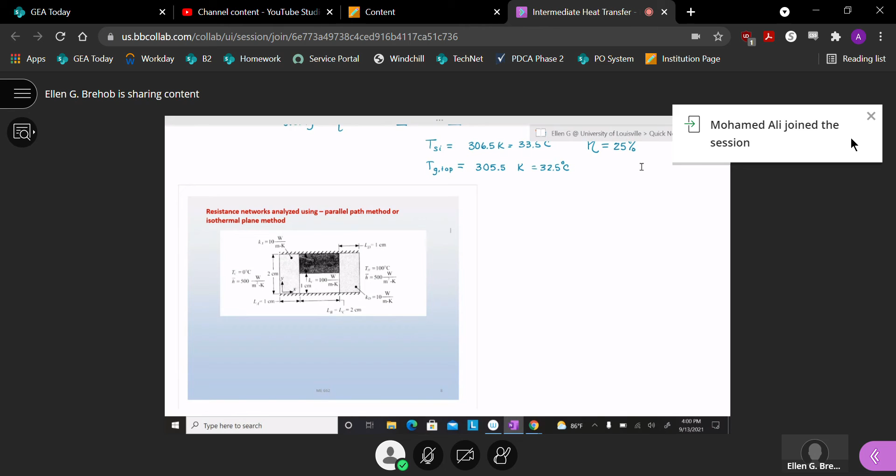Okay, thank you. All right, before we get started, this is lecture 3. We just finished this problem. What did it look like?

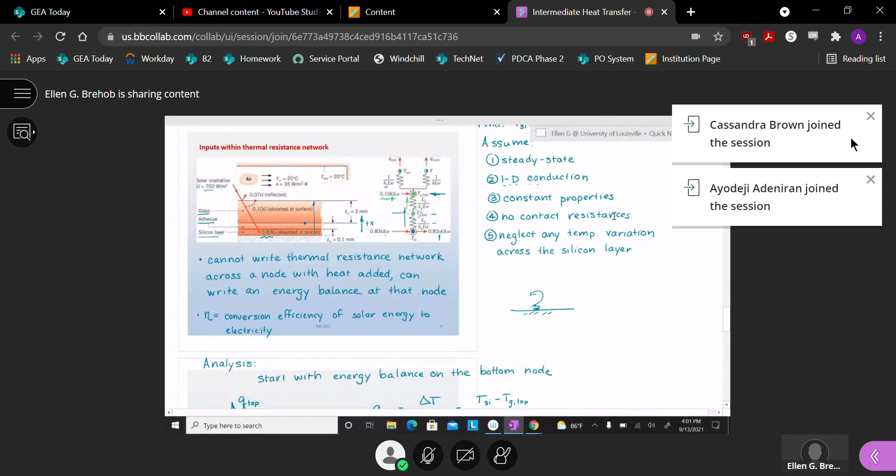We had heat addition at nodes of our resistance network. The interesting thing about resistance networks is we never want to have heat addition. We still can't write a resistance network across this whole system because the heat addition makes that invalid, but we can write it at certain nodes.

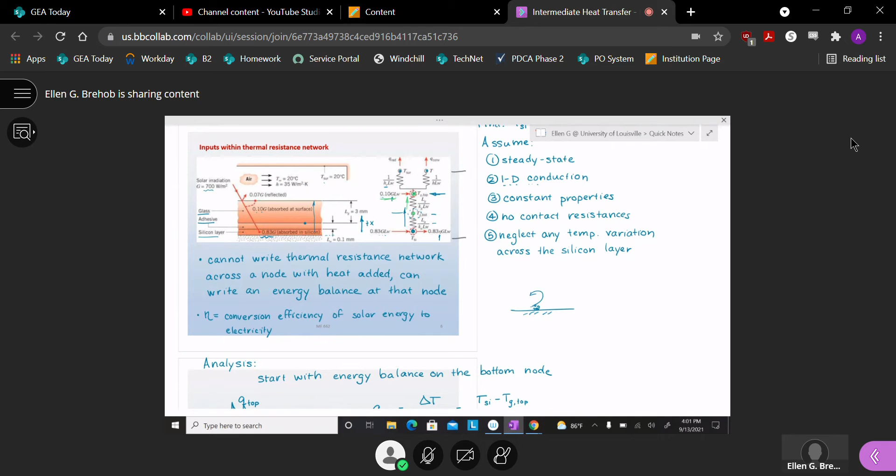Okay, and I got to come up with the problem, so you get to try it once. We kind of went through this one, but you haven't tried it. So in just a minute, we'll start this problem.

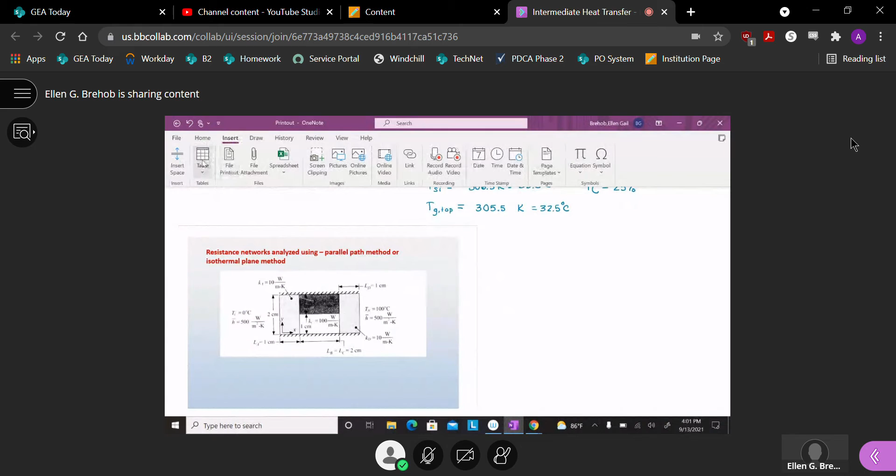Okay, I keep having this announcement and I forget to make it. Do you recall it was your first homework set and I asked you to look at some student work? It was taken from a different course, not this course. It was just some problems from 2 students, and one of the students, I loved grading his homework. Some of you wrote that he was verbose. Anyway, I just thought that was funny.

So it's like, you need to be more concise. But I'll tell you, I found his homework pretty easy to grade. I could follow through the steps. The handwriting wasn't the best, but to me it overrode that, since he spread stuff out with all the steps listed. I think in general people thought it was okay, you just thought it was maybe too long. And when students hand in homework, people would have like 5 sheets and this guy would hand in like 20. But it was like, I knew what I was getting. Anyway, not necessarily encouraging all of you to follow that mode, but I probably sway more towards finding it easier to grade homework with more steps explained than these really concise homeworks.

Somebody asked about engineering equation solver, EES. You will likely have to ask me some more questions, but this is what I know for now: there is a way to download EES from the engineering software bundle at the U of L. It will be on the Speed IT website, and I can give you that information.

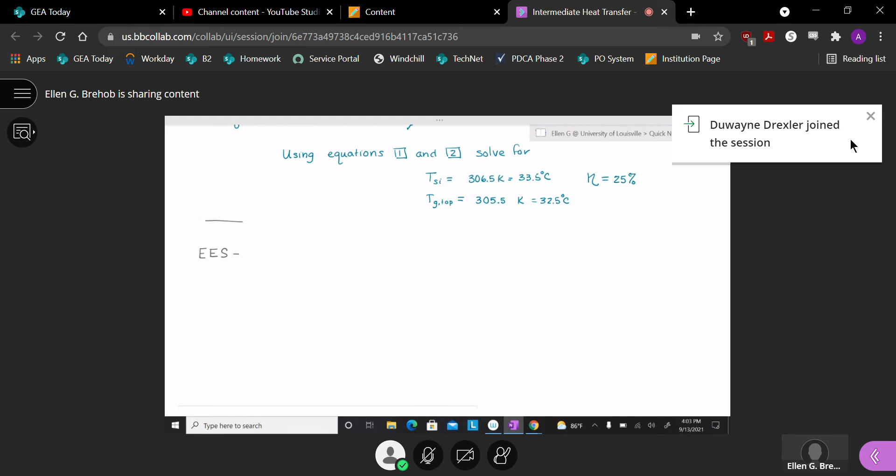But I'll tell you that you need to be on the U of L network, so you have to be on campus. I think our library is really nice, it's got good air conditioning, it's pretty big, it's pretty quiet. If you came to the library sometime to work, you would be on campus.

You could use EES. I'm also making a pitch that we have a student rec center, a pretty nice gym facility. I don't know that you want to study there, but you could study there and then get a workout. So you could be on campus and there may be a reason why this works for you.

So let me know and I can send you more links, or it's probably not too hard to find if you went to Speed IT. But I think that is not what most of you wanted. I think you were hoping there was a way to use it remotely. If you're thinking back about a year ago, somebody who really wanted EES to be part of their course went through big hassles getting VPN accounts for each person who wanted to use it, and Speed IT is just not going to do that again.

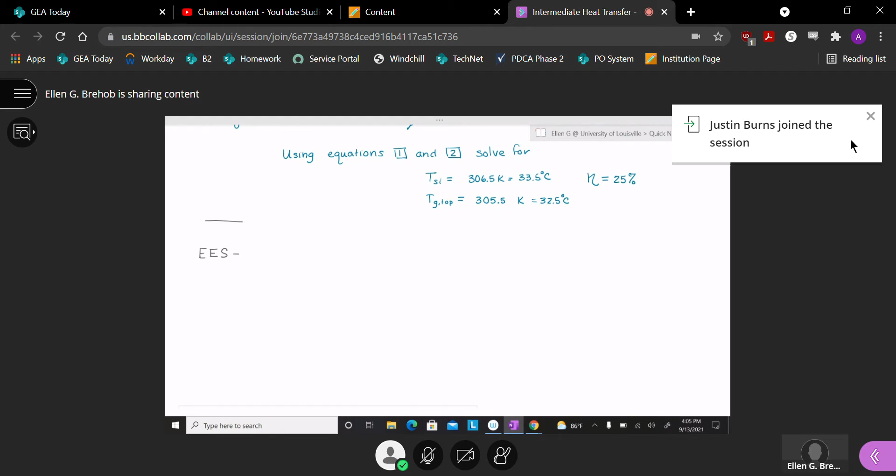So I'm telling you the options. If you want to be on campus occasionally to use EES, there's a way to figure it out. If you want to use it at work, you are going to have to work with Carlos or whoever else gets you guys access.

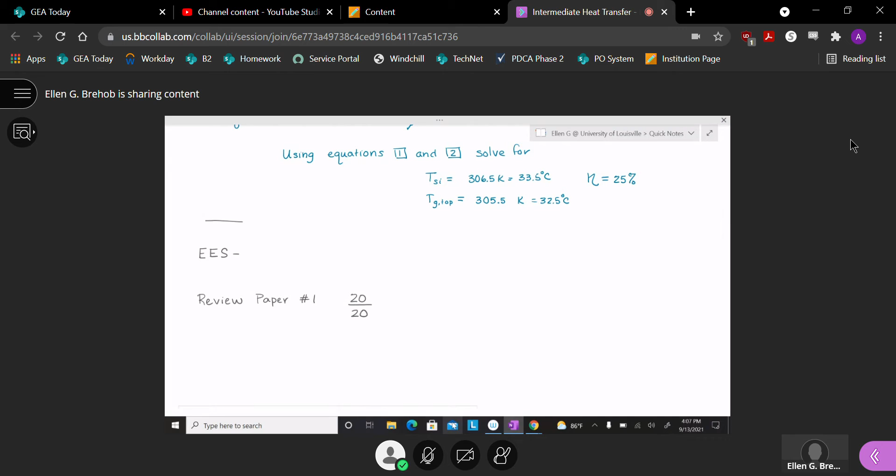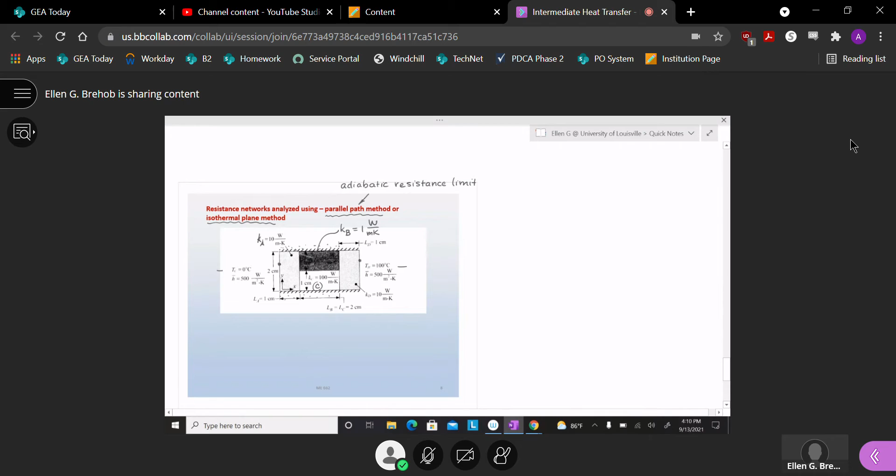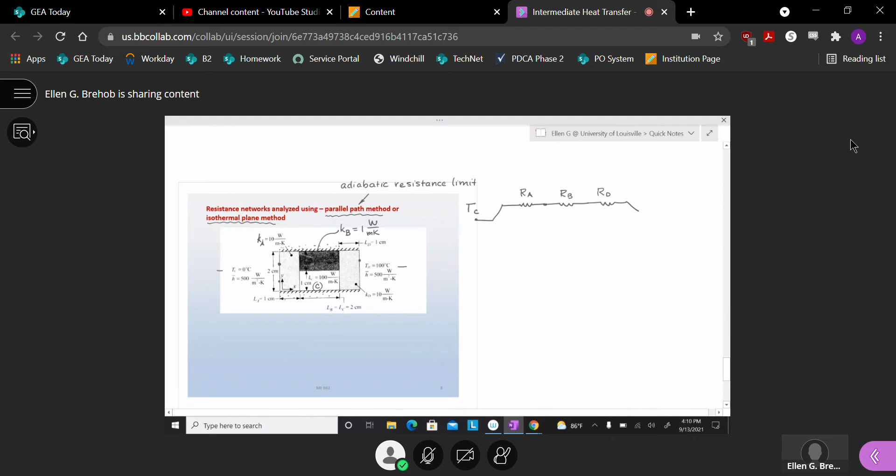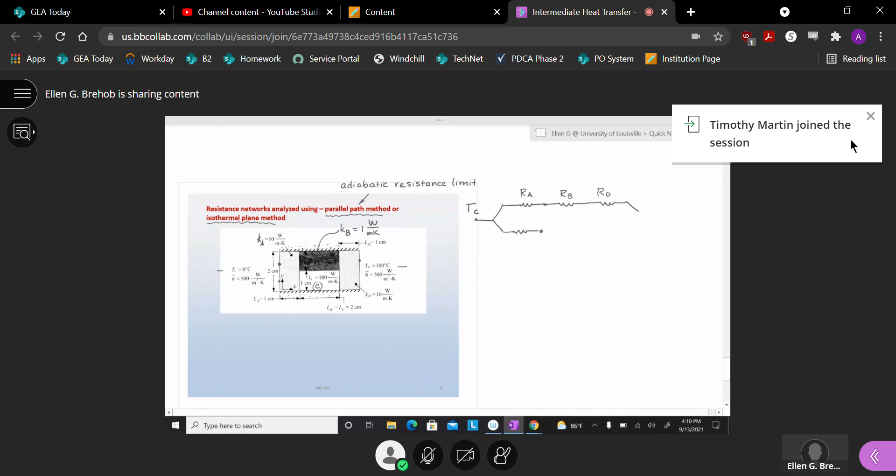The parallel path method picture: I have a temperature node over here and a temperature node over here. Heat that starts flowing through material B - I'll show it first goes to material A, then material B, then material D. That is in parallel with some heat, some energy, that starts passing through material C. It stays on that same path - it's going to go through A, R-C, sorry I messed that up, A, R-C, and then R-D.

So you can picture some of the heat going through one path, and some going through this other parallel path. This is the picture for parallel path, and I like this name way better - adiabatic resistance limit. I can sometimes think through why that name makes sense.

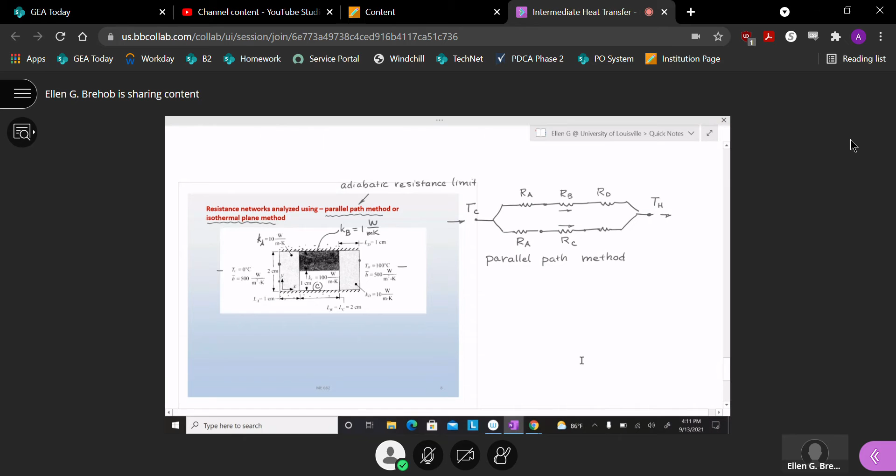Okay, the other one is isothermal plane. An isothermal plane means that each place you move to a new material, it's a uniform temperature. So for example, I have some unknown temperature T1, and I could put maybe a T2 here. So isothermal plane would say I got cold here, and it all goes through to material A.

But now, once I get to T1, these packets of heat can determine whether they'd like to go through B or C. I don't mean it can decide, but you can think about it this way: if one has a lot more thermal resistance, then maybe a packet heading this direction will decide it's easier to get through C, since it has a lower thermal resistance. So it chooses one of these pathways.

Okay, and now we'll get to another plane of constant temperature. And now all of that heat has to pass through that slab of material D.

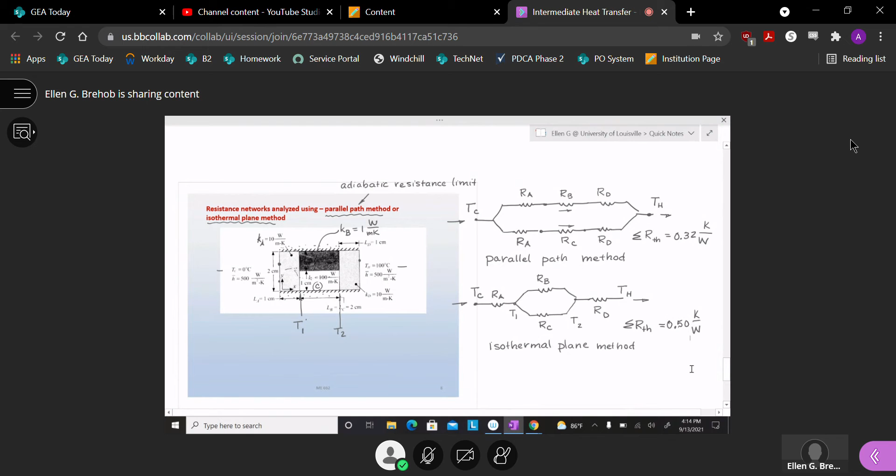If I summed up using the isothermal plane method, thermal resistance is 0.50. It works out that the parallel path method will always give a lower thermal resistance. This was just a given example, but no matter what we picked, it might be a small difference, but it will always be a little bit lower.

Okay, let's do one more thing. So they gave us the temperatures on these two faces. If I calculated heat transfer through this, you can picture that the rate of heat transfer through the parallel path method is going to be larger since it's got a smaller sum of thermal resistances, thinking Q equals delta T over sum of thermal resistances. So this Q would be 313 watts, and this Q is 200.

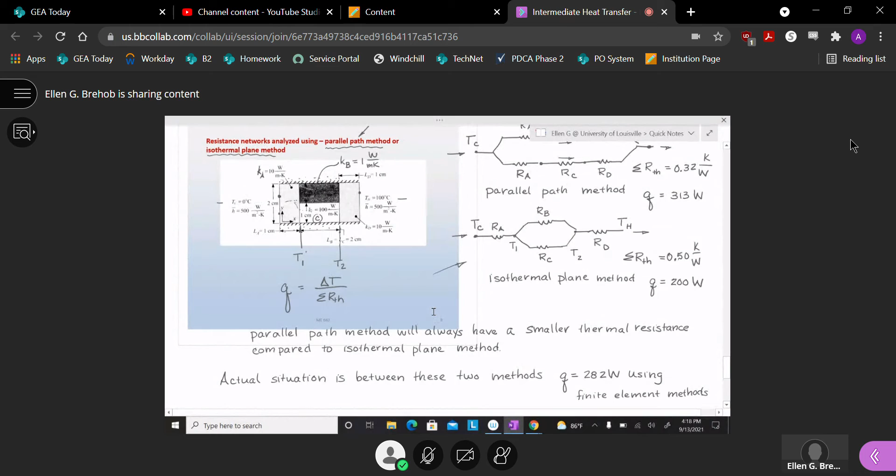And the reason that neither of these resistance network models is perfect is that if I were drawing heat flow lines through this, I have material A and material D, then material B, which has low thermal conductivity, and material C, which is high, so it's going to be able to transfer heat. If I were drawing heat flow lines, I might have something like this, heading this direction, but I can see that this is going to be a simpler pathway.

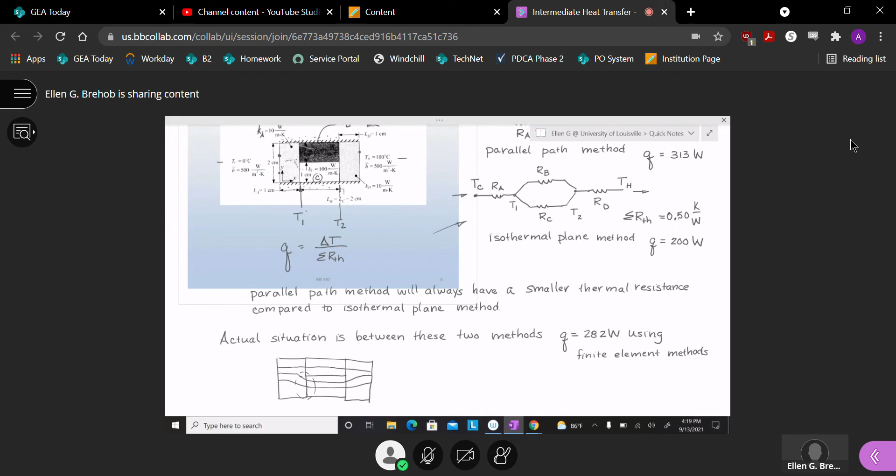Okay, so flow that's in the upper half might go through material C. The thermal resistance network is based on one-dimensional conduction, that's one of our assumptions. But through these materials, it's not one-dimensional, it's not only in the x-direction. We've got some transverse heat transfer, and so we don't do a perfect job.

So our estimates may be okay, and in particular, if we don't have such a dramatic difference between these two materials B and C, we might not see that much difference between these two paths. But this problem was made up to show a little bit more significant difference.

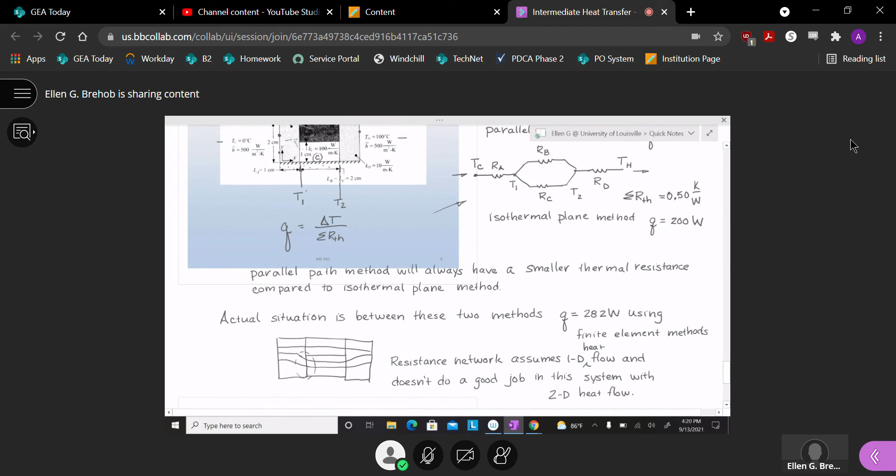This next problem, when we meet in person for class, I usually have students work in groups and solve this problem. But that's not going to pan out, so I'm going to show you a little bit, we'll set some of this up. There really isn't too much interesting about this problem. You get to see some different types of resistance networks, different terms that go together in the resistance network.

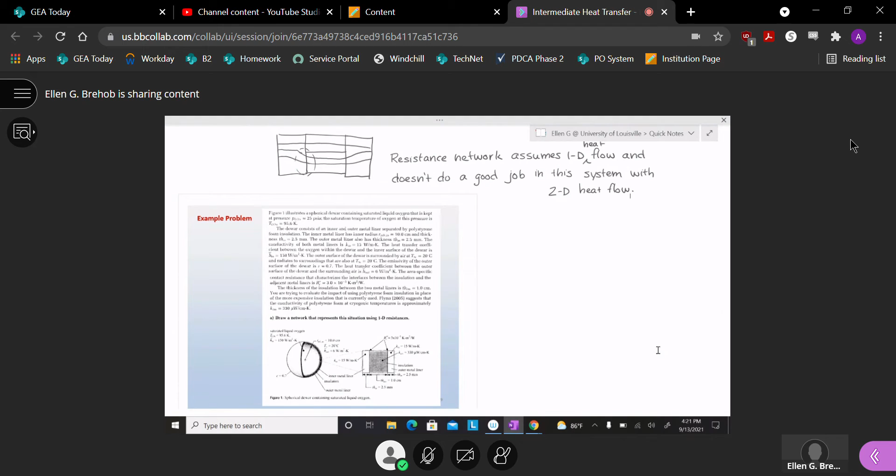The thing that I think is interesting is this has radiation going on at the outer surface. And we talked about radiation involving a surface temperature, and we don't know the surface temperature. So it's a chance to think through how you could handle that radiation with that unknown temperature in there.

Okay, this has a lot of details to it, but they're saying we've got this spherical shell that contains liquid oxygen, and they tell us the liquid oxygen is at 95.6 Kelvin.

And then they give us a whole bunch of information. Let me go ahead and sketch out the resistance network and not read through all of these details.

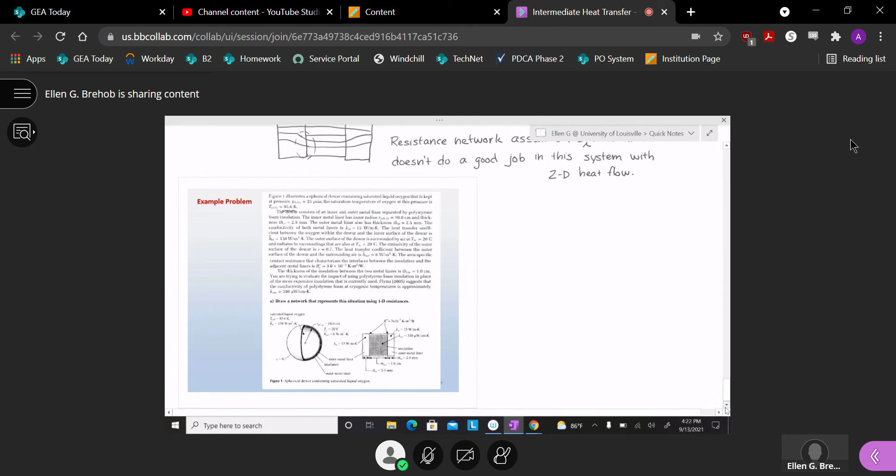But we have, from this inner surface, I'm going to start from liquid oxygen. There is a convection coefficient. And then we have a metal liner. There is a contact resistance. There's insulation. There's another contact resistance. There's another metal liner. And finally, that is the outer surface of the tank.

They tell us that the ambient temperature surrounded by air is at T infinity of 20 degrees C and radiates to surroundings that are at 20 degrees C. So our air and our surrounding temperature are the same.

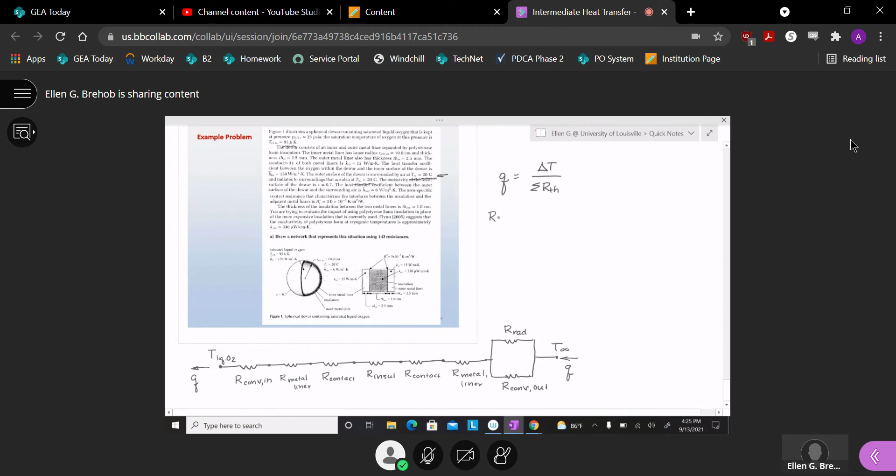For convection, the form looks like 1 over heat transfer coefficient and then surface area. And so we got to look through and see where they give the convective heat transfer coefficient. The heat transfer coefficient between oxygen within the dewar and the inner surface is 150.

And one of the difficult things is usually figuring out surface areas, but I'm going to remind you surface area for a sphere is 4 pi r squared. So you got to figure out what radius you're at. But let's say we know everything. We got those too. For the metal liner...

This is a conduction resistance through this, albeit it's a thin layer and it's metal, so it's probably pretty small. But that would look like 1 over R1 minus 1 over R2, over 4 pi K. And this is going to be K for the metal.

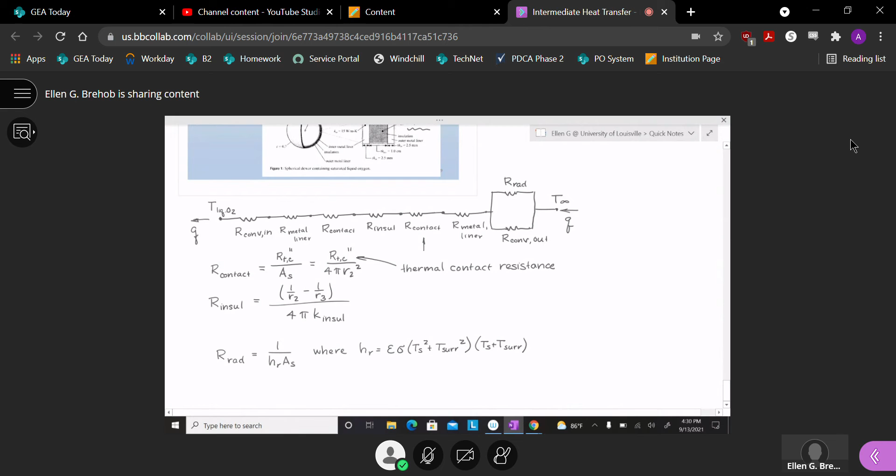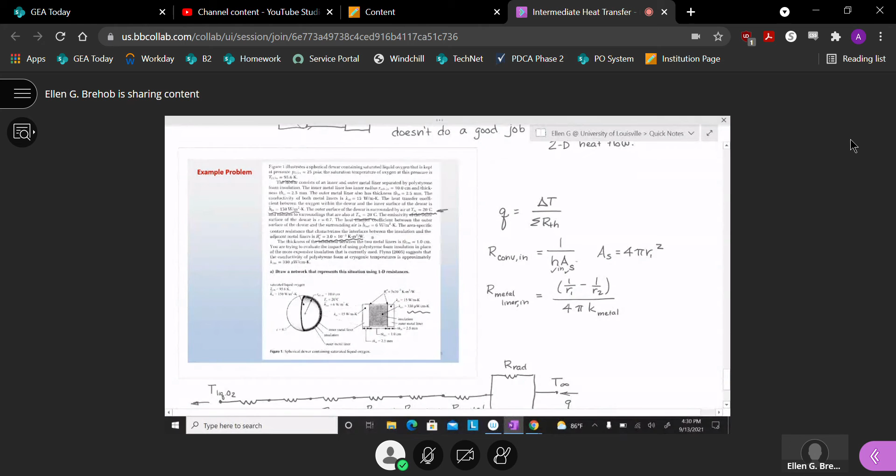It is given in the problem statement. And I know I did not read through all of it, but if you looked a little bit later, it's given right there. And you're imagining that I don't have perfect thermal contact, and because I have metal layers, they're saying this contact resistance might be significant. I should probably include it. It might be on the order of these metal liners.

So this is the one where once we get here and we realize, we're given the liquid oxygen, we know T infinity, so we know most temperatures. We don't know that surface temperature. So one way to attack this is to guess what this temperature is. So the other day we had this approximation.

And it's for a relatively small temperature difference. I'm going to say I don't know what this T surface is, but I'm going to say it's not that much different than T infinity. I'll just put T infinity or T surrounding, putting T surrounding in here as my estimate.

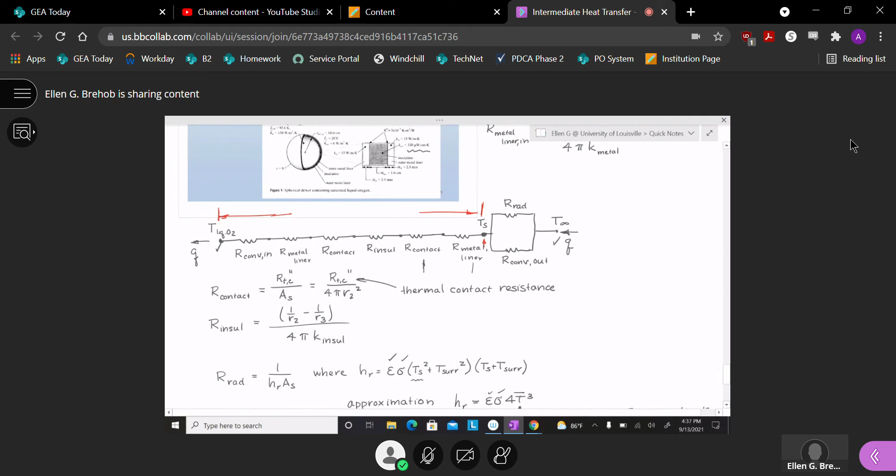I'm going to work from here to here, and I can solve for the surface temperature. So I want to rewrite this equation one more time. We didn't know it, we did some workaround to make an estimate of it, but now we could solve for it.

All right, and already I don't like that because that's going to give me a negative sign. Liquid oxygen's way smaller, so let's just go ahead and reverse that order.

And now, and I will not remember all of these, we want to do our convection in, our metal liner on the inside, contact resistance on the inside, insulation, another contact resistance on the outer surface of the insulation, and metal liner out.

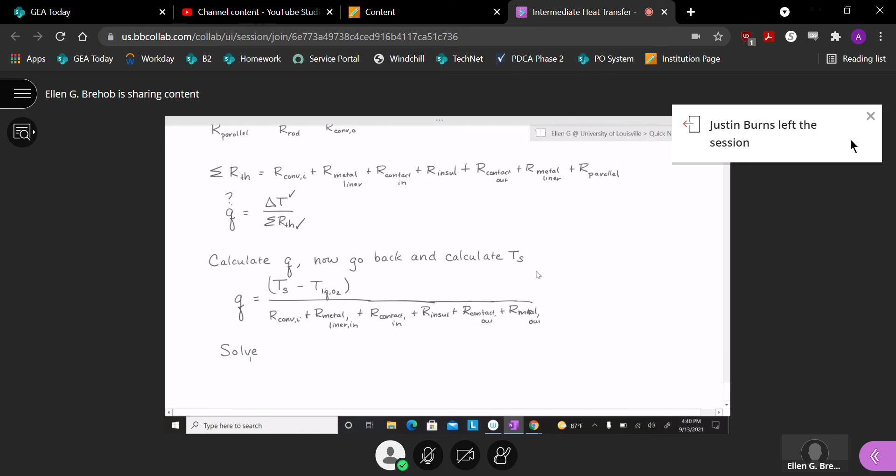Yeah, I think I was not... so I mean, they look like they're the same up here, but when you run through the numbers, because they have areas in them, they turn out different.

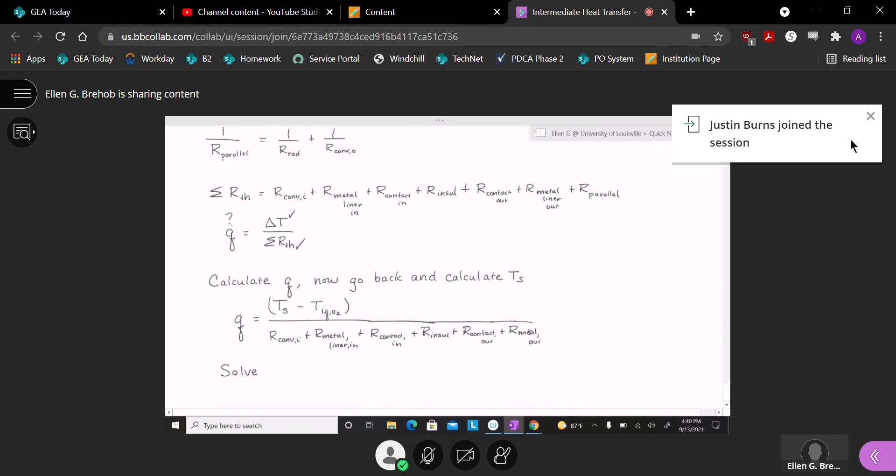Right, okay, so I've rewritten this equation, and our whole goal from this is I'm using that Q that I had, I just came up with the Q. I'm using that here. These are all the values I've previously calculated. I know for liquid oxygen, I'm going to solve for surface temperature.

All right, and this is where you would be happy if you put this into a spreadsheet, because you wouldn't have to keep calculating these things. So I could go back through and I would update my H sub R. We had to make an estimate for it, but now I can put in that surface temperature.

Dr. Brehob, should the parallel resistance also be in the denominator of that Q equation I just wrote? Yes, okay, no. And you're giving me a good chance to hit this one more time because I've been scrolling around too much, likely.

Okay, so we're working from surface temperature to liquid oxygen. If I look back up here, you're right, I'm only working...

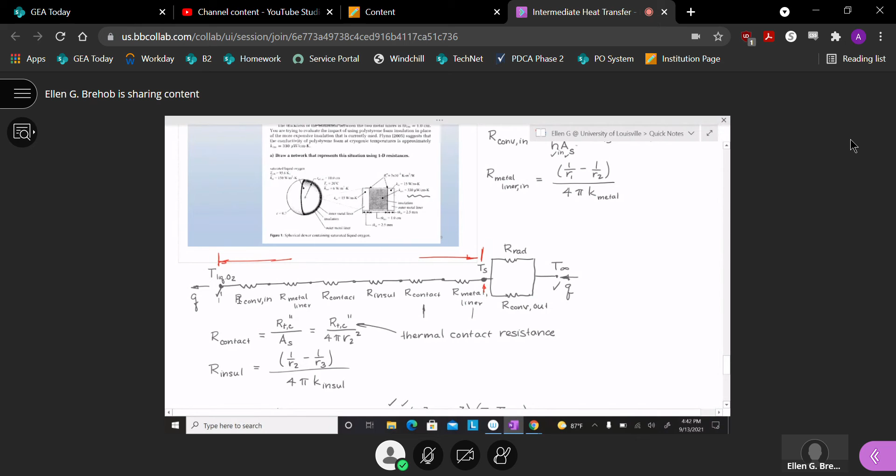Thank you. And then why wouldn't you use T infinity here instead, instead of T liquid? Like, go the other way and use the parallel resistance instead.

Okay, the reason I think is because you've got this unknown H rad in it, which we're trying to recalculate. So you could do it the other way, if you're thinking you'd just work across this section. But because this is the term we're still working on, these other resistances, even though it's longer, it's all the same thing. So to me, it was easier to work that direction.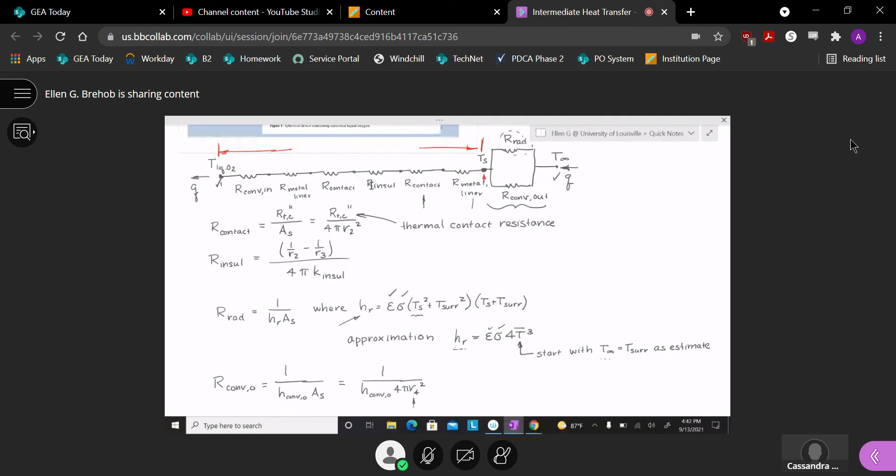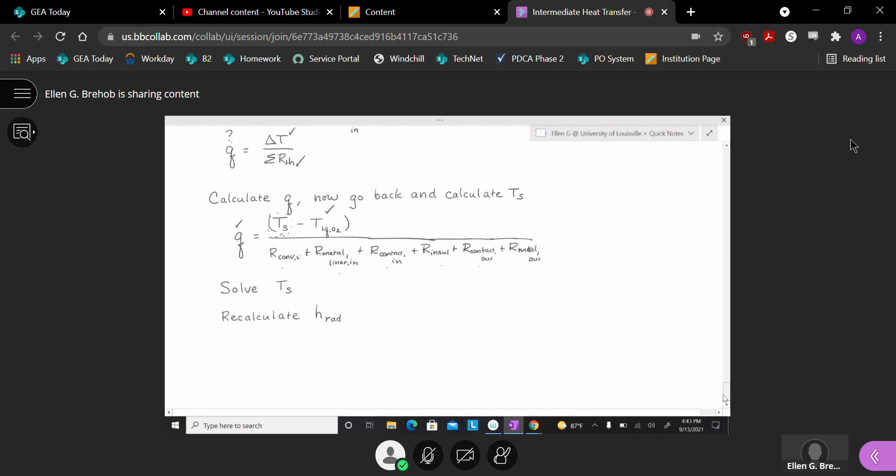Okay, thank you. Okay, so in my steps, what am I saying? So we solve for T sub S. We can recalculate H rad. We can recalculate...

And again, that's going to be the total. That's going to involve the two resistors in parallel, since we've gotten this new radiative heat transfer coefficient. Now we've got this new thermal resistance. We've got our same delta T. We're going to recalculate Q.

Let's see, I went through this process three times: solving for a T S, getting a new H rad, getting a new sum of thermal resistances, calculating the new Q. And I stopped, and I'm trying to give you some kind of indication... my first time through...

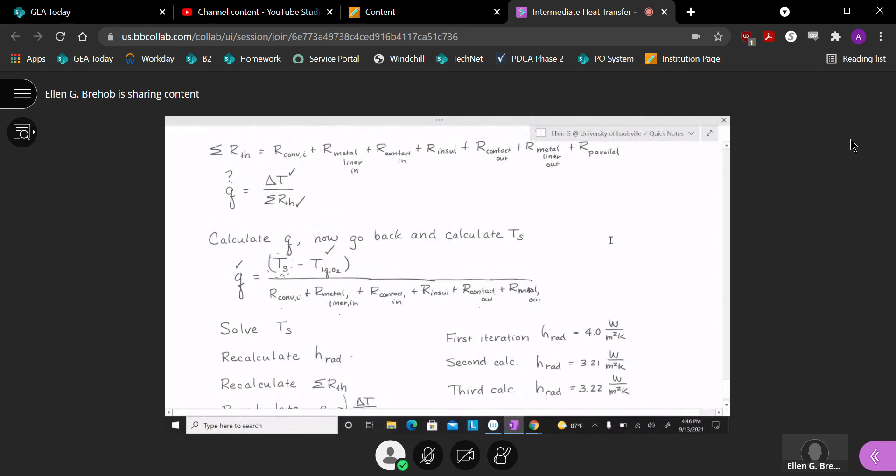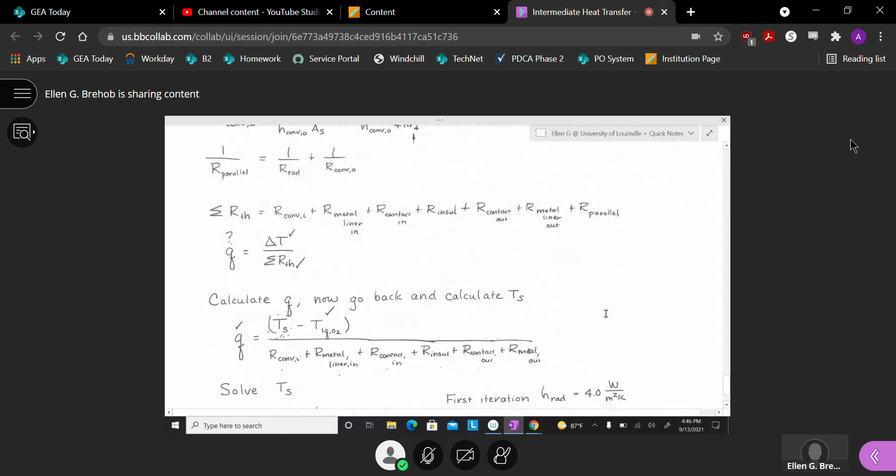All right, so that was a lot of cranking through numbers. One thing I'd like you thinking about is the issue of this radiative heat transfer coefficient, which always looks just like another resistance element, but because it's based on knowing surface temperature, if I look back up here, sometimes it throws an additional complexity into the situation. The way I got around it is by making some guess and iterating through the problem.

Okay, and if you're concerned, this is usually not a problem where you have issues with it converging. It will converge. I think that is it for talking about thermal resistance networks. And then I am ready to move on to lecture 4.

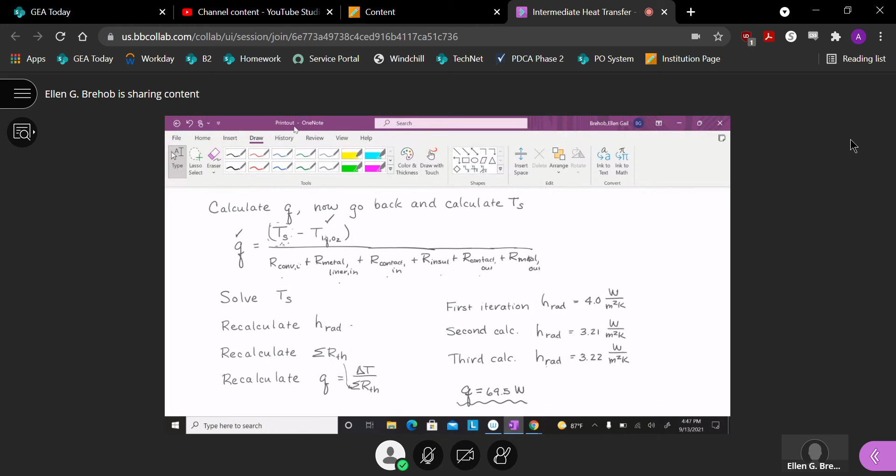Hi, Dr. Brehob, I have another question. Yes. So what did you do for the third calculation? What estimate did you use?

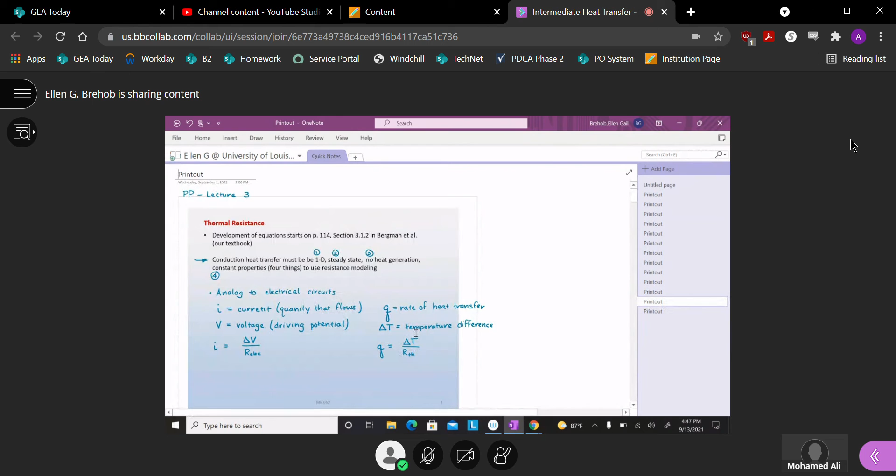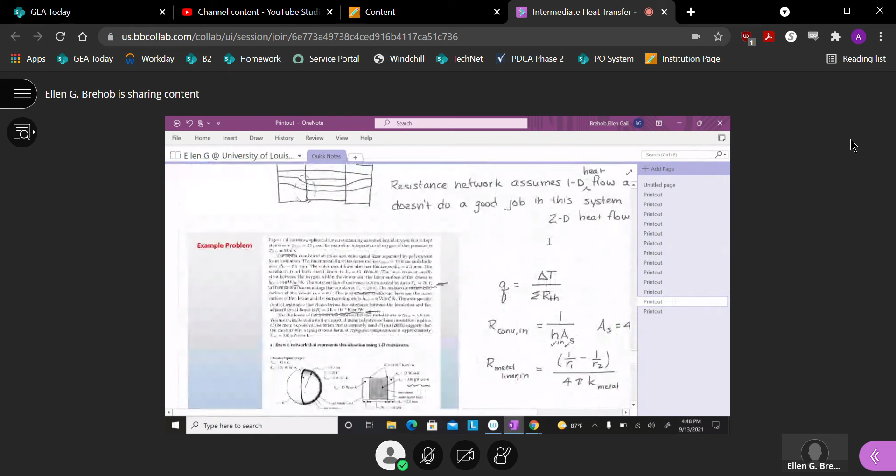Okay, I'm not sure I got your question yet, but I'm scrolling down to where I think you're heading. Yeah, so I followed how we did the first iteration. You approximated using T... oh, I just said I'm going to guess T infinity is equal to T surroundings to use in that estimate.

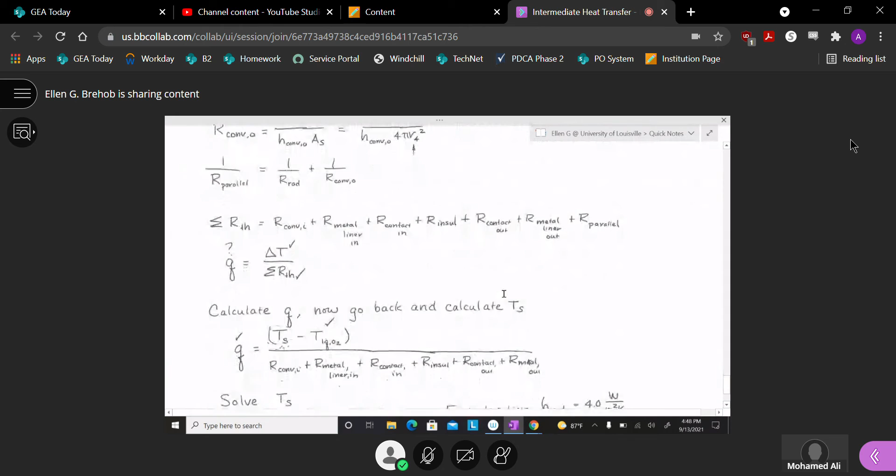Right, and then you went back for the second calculation and solved using the left-hand side of the network. For the third calculation, what did you do? Once I've got a surface temperature the first time, the third time I'm going through the same thing, I'm going to get a new surface temperature. So I put this in. Let's see, where did we do this?

So we recalculate a Q from this second iteration. I've got my new H rad, I get a new sum of thermal resistances, I recalculate Q. And now, just like I did up here for that third calculation, I'm using that new Q. I'm using all of this stuff, and I'm going to use my red pen because I'm circling stuff, but you don't know what I'm circling.

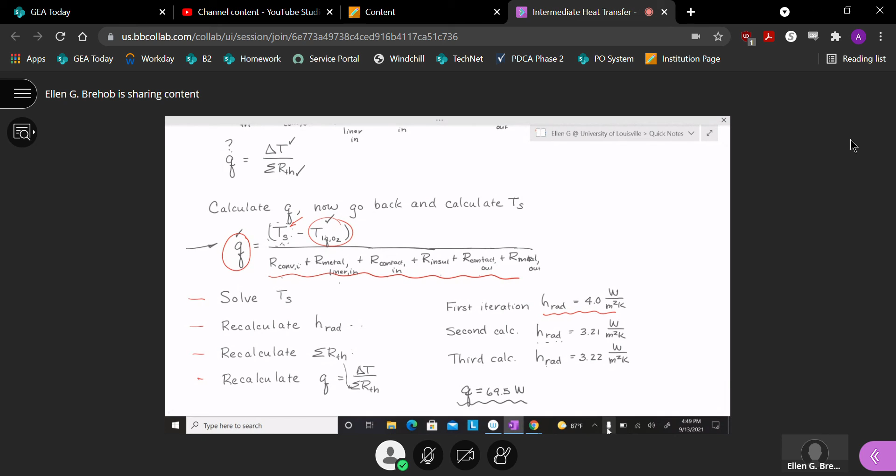Okay, so I've used my new Q. All of this stuff stays the same. I'm going to solve for a new T surface, and now I'm just following through these steps again. So to me, except for the very first time when I had to figure out some way to get an estimate for this, after that I'm always using my new surface temperature in this equation to get the radiative heat transfer coefficient. Okay, got it. Thank you.

Okay, so this would be lecture 4. And we are going to talk about fins. Another name for fins is extended surfaces.

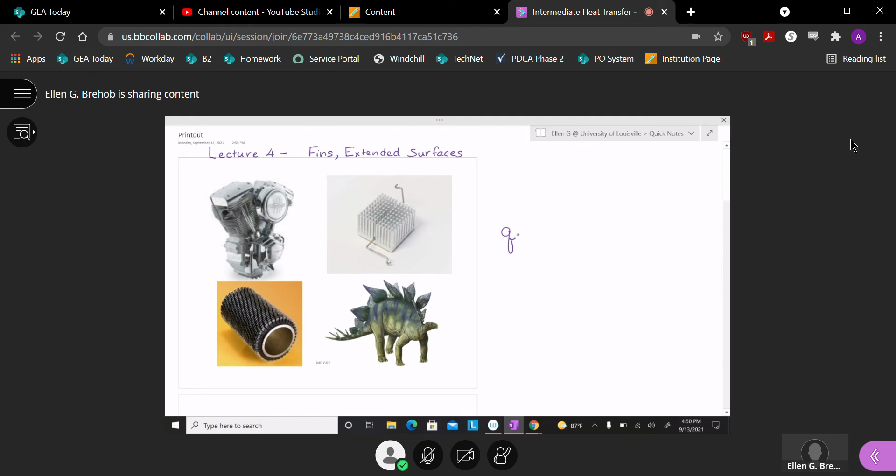There is a reason why this topic fits into conduction, so this is still in chapter 3 of your textbook. At first I always think, man, why would that be? Because I picture the convection coefficient, and I've just written down Newton's law of cooling, and we think about having a fluid pass over these fin surfaces, that it's a Newton's law of cooling kind of problem. But the simple analysis we're going to do is a conduction analysis, and we're going to set that up in a minute. I have these pictures here so you can think about some different fin surfaces.

So this is a motorcycle engine, and the combustion chamber may have fin surfaces, and for motorcycles that may be exposed, as you're running down the road, to ambient air. This next picture is common, at least in older computers, like a CPU unit, and it's got these hooks to try and have a nice fit, so it sits down on top of the electronic component that it's trying to cool, giving a nice force fit.

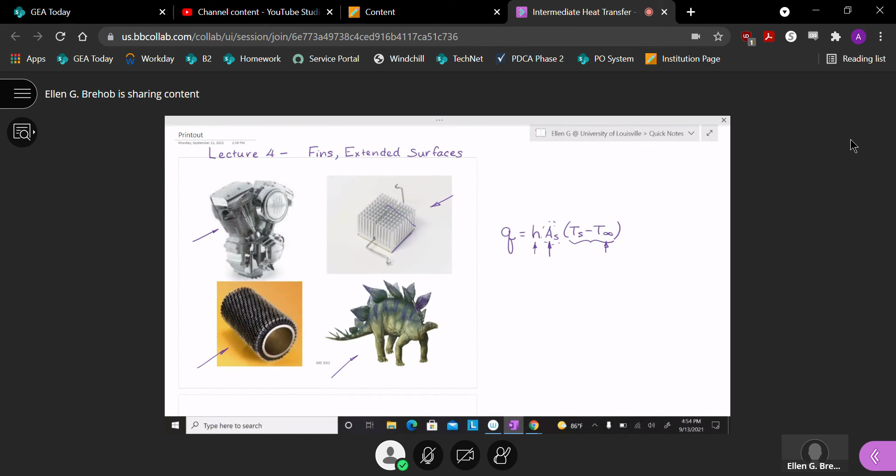And then the third thing you can think about is you could decrease the fluid temperature. But often you're going to try and use something that you have available, like river water or ambient air. So cooling the water below ambient temperature has some costs associated with it. So in practice, there is a reason why sometimes this idea of increasing surface area and adding a fin might be the cost-effective way to get more heat transfer.

All right, this is a generic picture that comes from your book, and this is showing an example of an extended surface or a fin. So it's attached to some base surface, and we are going to do an energy balance on this little orange section, this differential element of the fin.

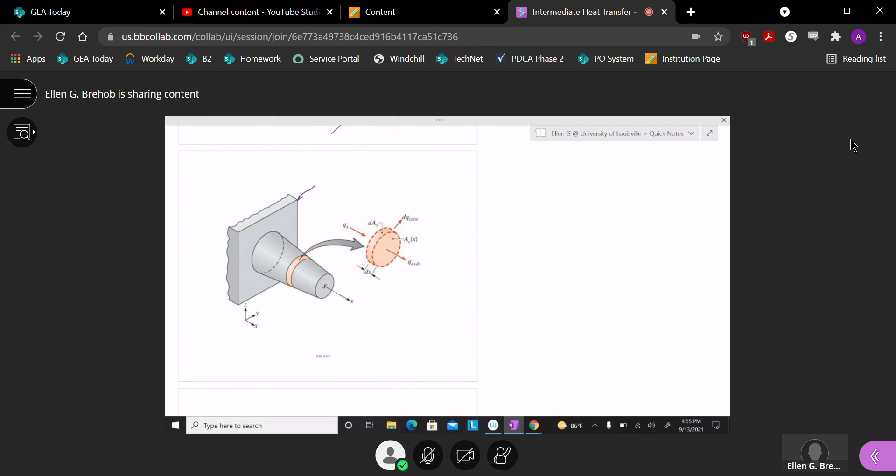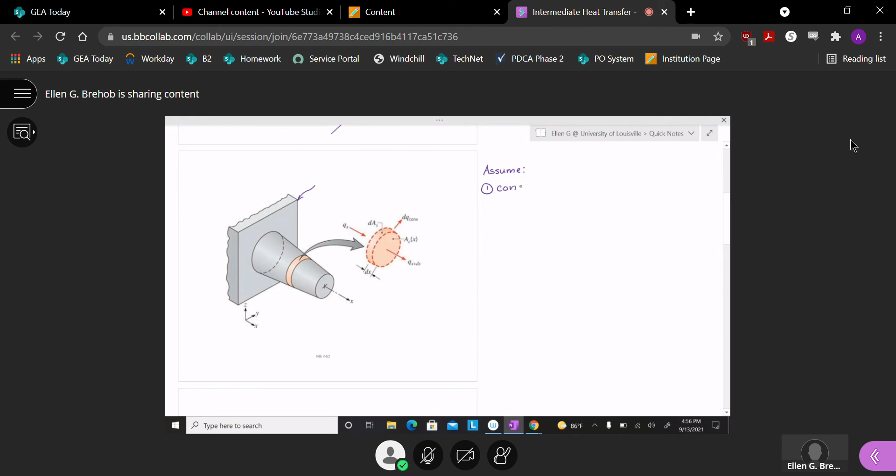We make some simplifications in our fin analysis. We're always going to look at constant properties, and that just says that K is going to be isotropic - it doesn't vary in direction, it's just one constant value.

We only look at a steady state analysis for fins, no volumetric heat generation.

Okay, and as our picture is drawn, they have X moving away from this base. Oh, here it is, let's look at that X coordinate down there. We only have conduction in the X direction.

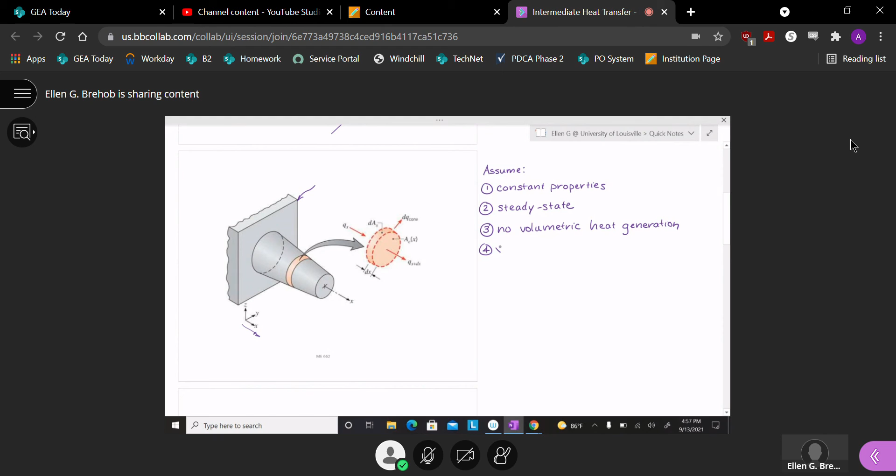Okay, so a way to think of this, X direction conduction only, and I'm going to make my sketch from the side view. So this is my fin surface, and I didn't draw it like they did. They've got it changing cross-sectional area. I've just got this slab pointing away from the wall.

Okay, and you can imagine that I have convection, so I got heat leaving this fin. But X direction conduction says that at each point, I'm going to assume temperature is nearly constant.

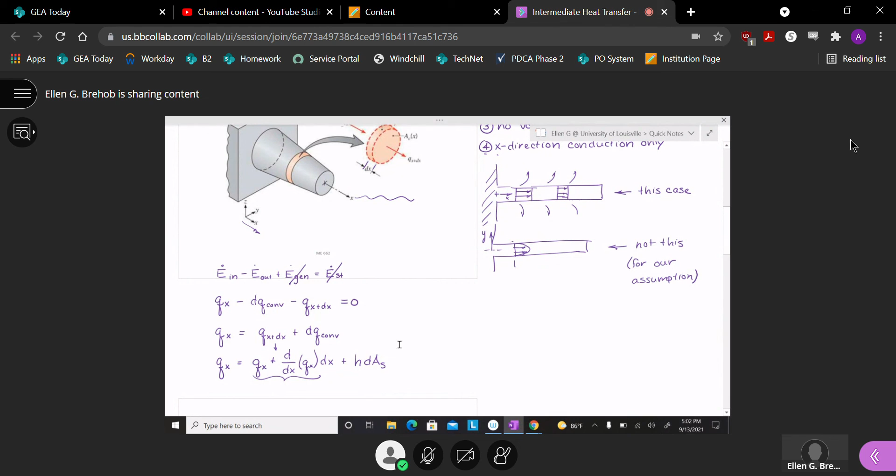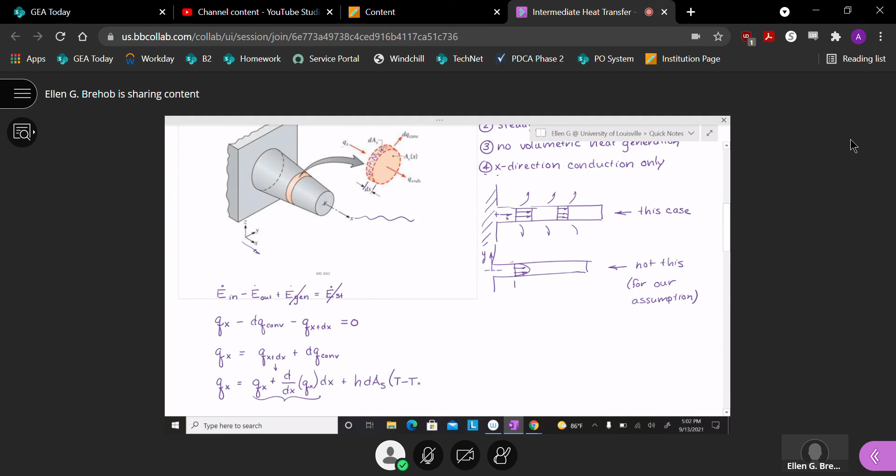Okay, and we're showing this little slice has a thickness dx. And dq convection, we're writing that... okay, so we're looking at convection off of this cylindrical surface, so it's a heat transfer. They're using a differential surface area. And then this is going to be temperature minus T infinity. That looks like convection.

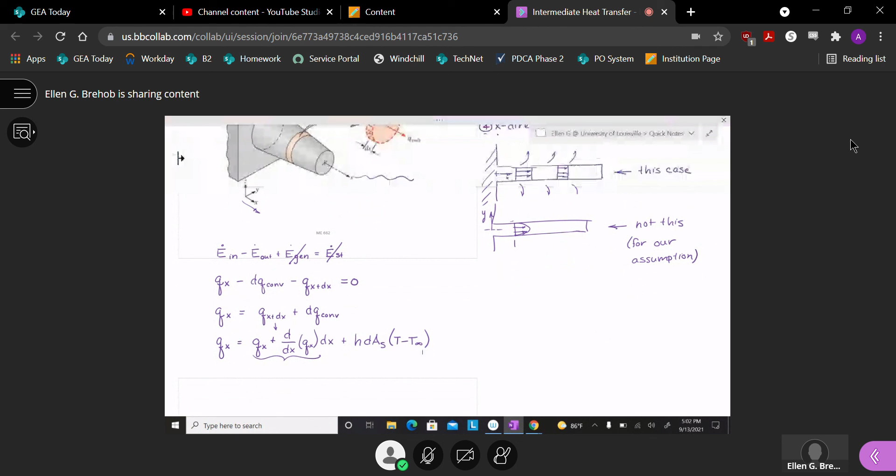You can already see that since these are on both sides of the equation, I could cancel those out.

I'm substituting in for qx in terms of Fourier's law. So minus k, and I've got a cross-sectional area and dt dx. And I'm going to put my little note over here.

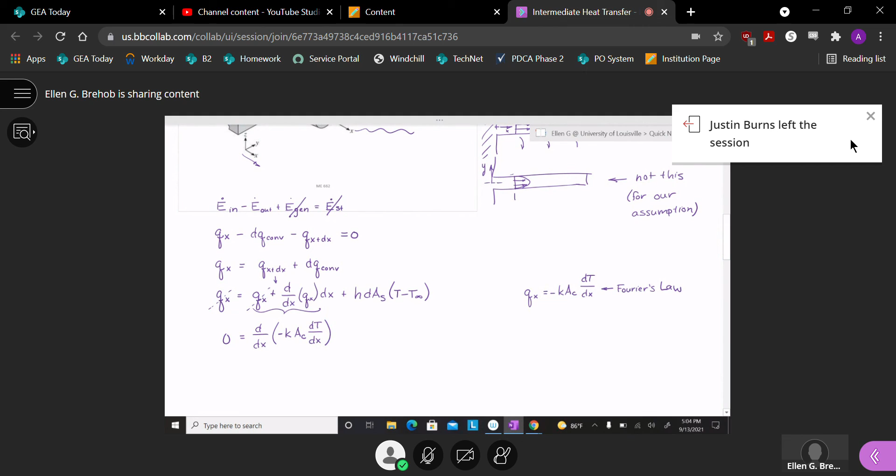All right, and I'm just repeating this h das t minus t infinity. Okay. I am going to go ahead and take k out in front, since we're going to say constant properties, and then I'm going to divide through on both sides. So I'm going to have 0 equals d by dx of ac dt dx. But now I took that negative k out in front, and I'm going to divide through, so I got minus h over k.

Okay, I got another bad thing, but let me finish this off. Das t minus t infinity. Okay, was anybody getting ready to tell me? And I only feel bad if you're like really questioning. All right, so I said I canceled these two guys, but I have a d by dx, qx. I need a little dx back here. I dropped that. So I'm going to try and squish it in here.

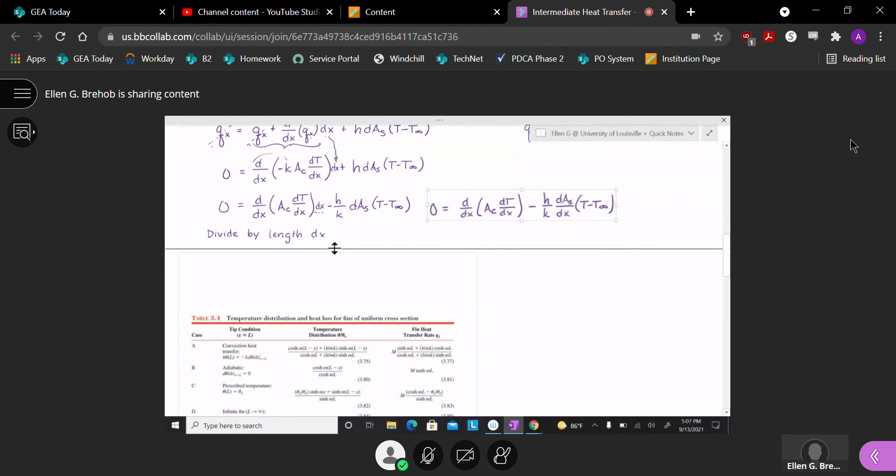Next thing I want to do is expand this first term, on the right-hand side of this. So 0 equals. So I can take derivative of cross-sectional area with respect to x, and then I have dt dx, plus cross-sectional area, and then d squared t dx squared. And I'm leaving the second term the same.

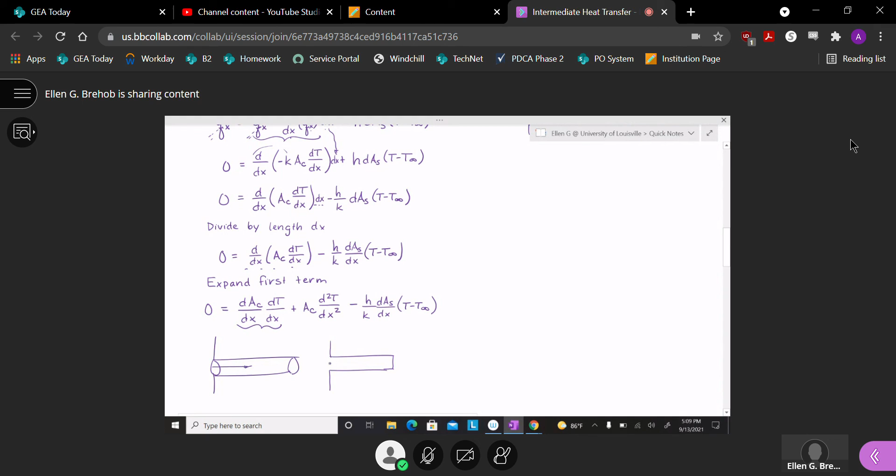All right, at this point, we are going to drop this first term. And the explanation we're going to give is that our first look at this, and we'll relax it later, is we're going to say we have uniform fins, uniform cross-section fins. So if I have a fin I'm going to analyze, maybe it is a pin fin, so it's a cylinder, and this is my wall. Not a good job drawing it three-dimensionally, but its cross-sectional area doesn't change with x. Or I could do, this one's easy for me to draw, if I had a plane fin, so it's just a slab of material, its cross-sectional area doesn't change with x. So for constant cross-section fins, this term drops out.

I'm scrolling up to my picture above for a minute. All right, this picture, they showed that cross-sectional area is decreasing. We can't analyze this using the equations that we're coming up with right now.

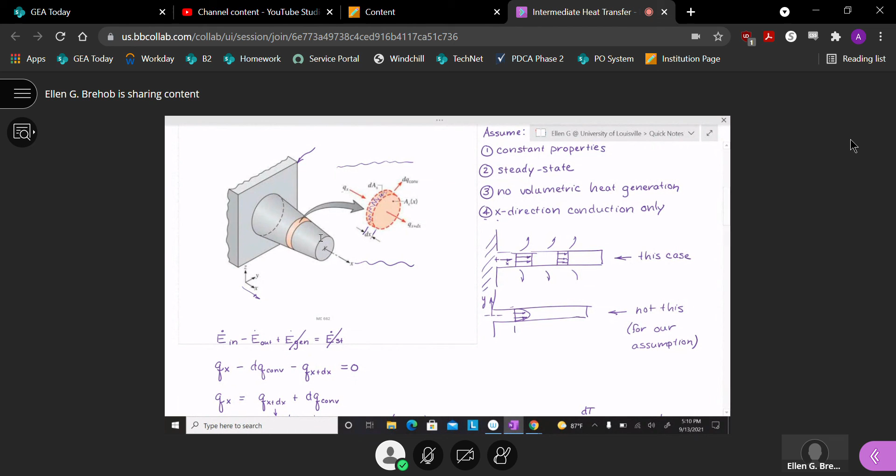So if we ever get a case for your class and we are shown this, would we just not be shown that changing cross-sectional area so that we can make that assumption? Because I wouldn't make that assumption if I had seen that other image first.

Okay, so that is the general case. And eventually we do have some fins that happen to be certain mathematical cases, like a parabolic fin. So we can handle some cases, but for right now, we're going to do more development with this uniform cross-section.

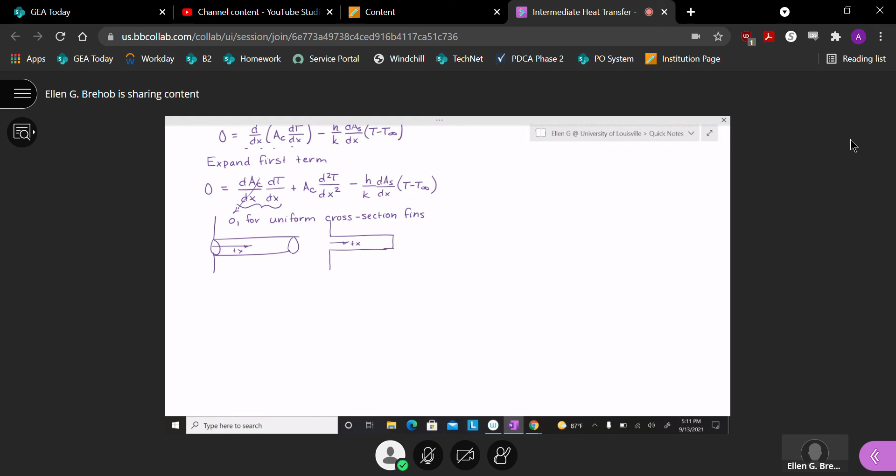If you're concerned, that was a general picture. They started out with that, but just know that these next sets will say uniform cross-section fins. You'll know when you have to assume that, or when we don't do the development. I won't show this detail of development when it's non-uniform cross-section, because the math gets much harder.

That helps it all. But you're okay with this idea now. I mean, you know what kind of fins we're looking at - that any slice I take in the x direction, I would always have the same cross-section.

Okay, yeah, no, that makes sense. That makes sense for this. I was just concerned about making the assumption out of the blue that this is going to be a uniform fin. But if we're told we have uniform fins, or at least given a diagram, then it makes sense. Yes, okay.

You will. All right, so what do I want to do next? So we've got this dAs - that's surface area, how surface area changes with the x coordinate. And for a uniform cross-section fin,

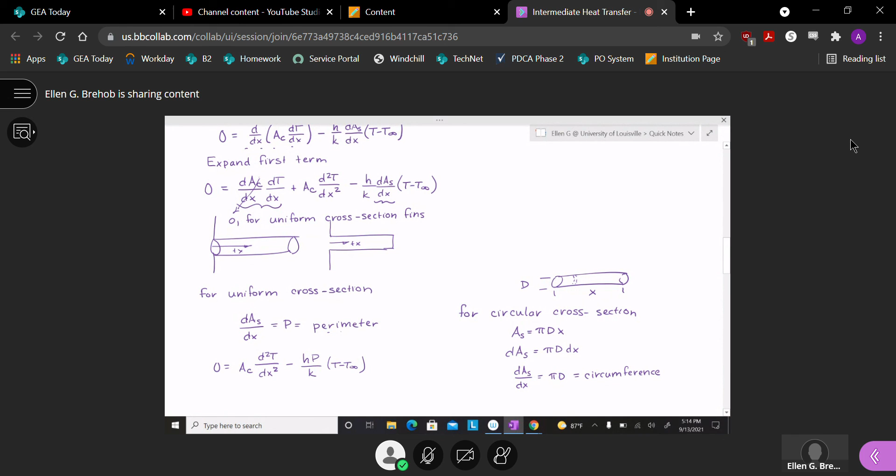So now my equation looks like this. All right, I'm nearly out of time. But let me do two more things, and I promise it won't be too much longer, just to get to this form. Now I'm going to divide through by Ac, cross-sectional area.

And then let theta equal T minus T infinity. So d theta/dx is equal to dT/dx, and d squared theta/dx squared is d squared T/dx squared. So my equation is now going to be converted to look like this.

All right, and this is the part I'm going to stop at, because so we've got this ordinary differential equation - it may have been a while since you've seen it, but this is kind of a classic one that you would have seen a solution to. It has a solution of a certain form. So we're going to just write down what this solution looks like that works for this ordinary differential equation.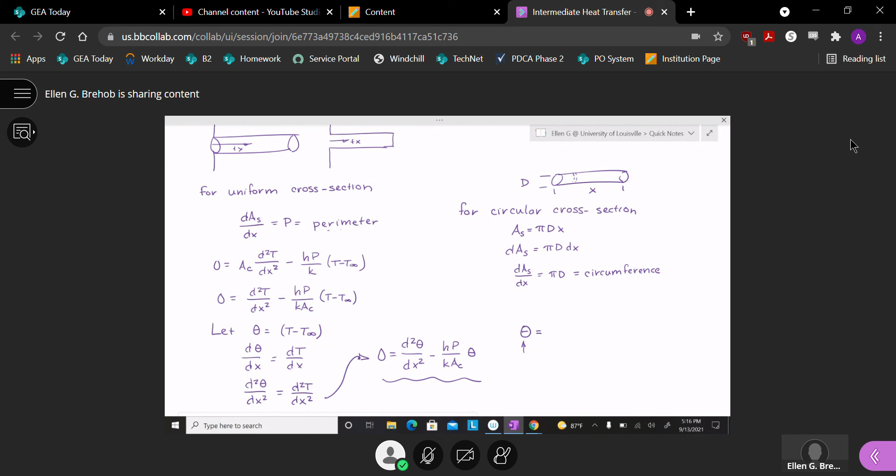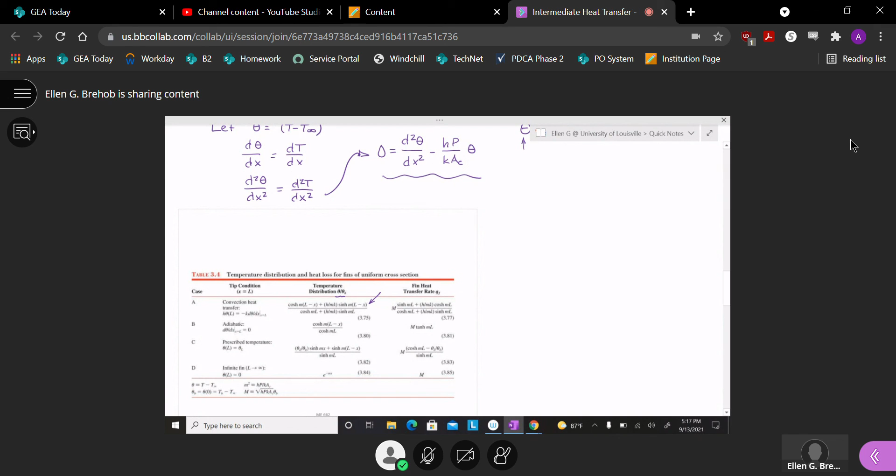Okay, and I'm sorry I didn't get very far, but we hit most of the math. I'll show you the form next time, and we'll see what we're heading towards. You see, I just can't quit quite yet - we're going to come up with, here's our thetas, some equations that look like these temperature distributions in this chart. Okay, I am going to quit now.

Real quick, if you scroll up a little bit.